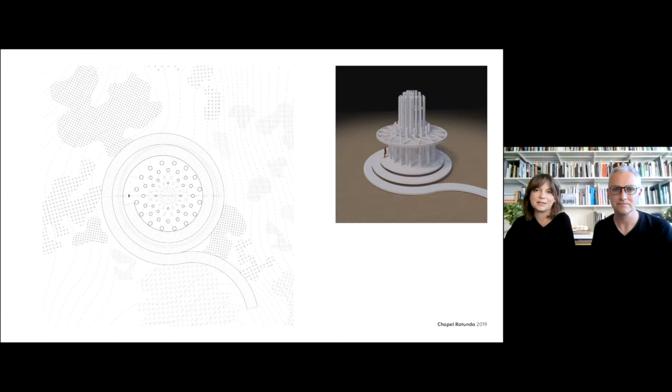Ryan and I started our practice together officially in 2017 after working together for almost a decade. We've always looked at architectural competitions as opportunities to test ideas, techniques, and partnerships through architectural constraints. It doesn't bother us if we don't win or receive recognition. It's the practice of continued exploration that keeps us motivated.

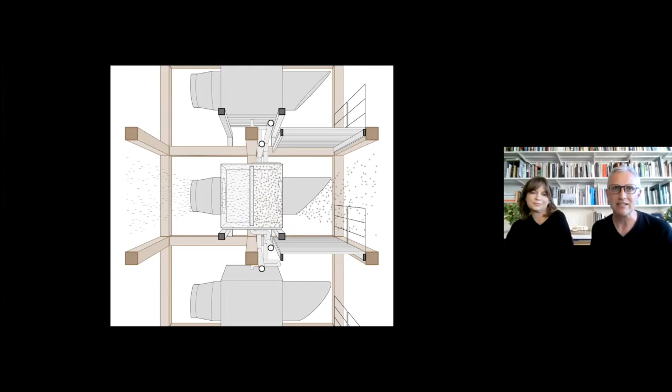The Urban Confluence competition was particularly interesting because it provoked a question that, to us, gets at the fundamental question of what our priorities are as architects. We've been thinking a lot about our roles as architects and how we respond to climate change. No longer is it tenable to suggest that a building for the long term, or utilizing increasing amounts of recycled materials, is sufficient. A more active approach is needed.

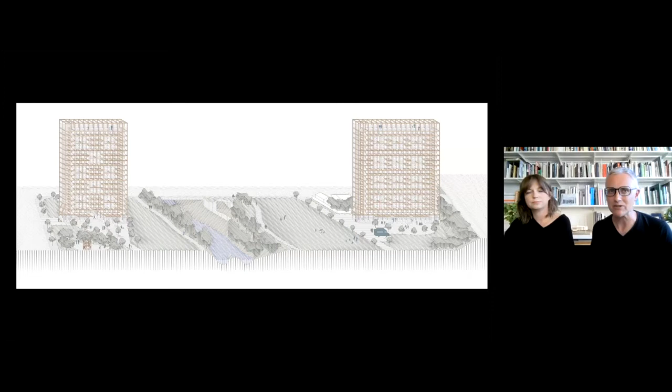Direct air capture is a burgeoning technology that scrubs CO2 from the air to be used for greenhouse growing, fossil fuel alternatives, or can be injected into the ground. By leveraging the attributes of this site, the Arena Respirator orients itself to the predominant wind direction to drive air through the system. Rising on each side of the river, this pairing of a large-scale porous framework visually links the east and west sides of the park.

Straddling the Guadalupe River, while providing a framework for CO2 capture and sequestration was one of the driving forces of the work. Another, as you can see from our proposal, was testing and pushing a representational technique that we have been interested in for a while.

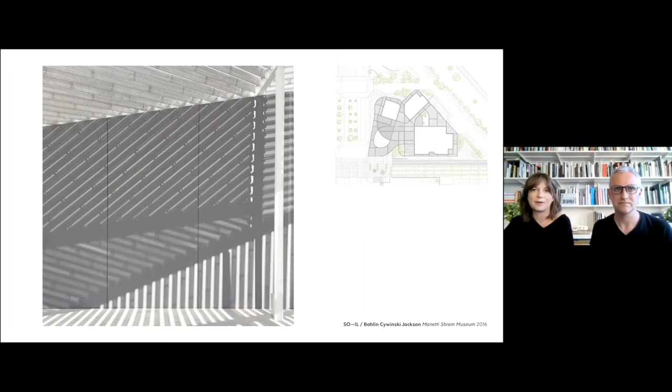Inspired both by the work that Ryan had done on the Shrem Museum of Art, as well as the conversations about formal projection that we were having while teaching Studio 2 and Design Media 1, we had been designing with this drawing technique for a few years, asking questions like, what are the minimum number of lines that can be used to convey an idea or a place?

How can lines be used to express light, form, material, and atmosphere? We know that representation, or how we draw our ideas, has a huge impact on how we see our work, and therefore how we develop it.

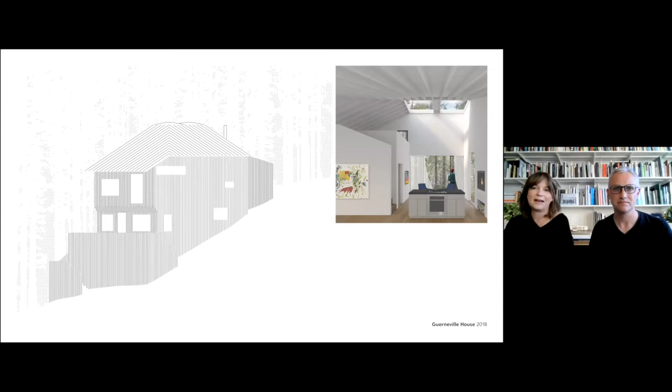For the Urban Confluence competition, we not only wanted to develop the work using line work or hatching as the primary tool, we wanted to tune the technique to work universally, conveying form, atmosphere, and materiality. Lena Kudinar, a then CCA student, joined our office that summer and was pivotal in helping us press these ideas into reality.

Reminiscent of the formal organization of computer processors and the racks used to hold computer hardware, a readily legible narrative specific to Silicon Valley conveys the uniqueness of this place. Like its inspiration, this framework anticipates technological change while drawing on the grid's immutable presence.

Limiting the materials that contribute to further carbon release, Arena Respirator uses a cross-laminated timber structure on a superlative, iconic scale.

Important to our work is an understanding of tectonic systems and how they can contribute to a building's environmental footprint. A couple of years ago, we were contacted by an emerging company that imagined an approach to building using recycled metal and mass customization robotic framing tools to deliver projects, specifically residential projects, with faster construction times and at more affordable prices. We partnered with this company on a residential competition based in New York, where we tested their ideas as well as our own collaboration.

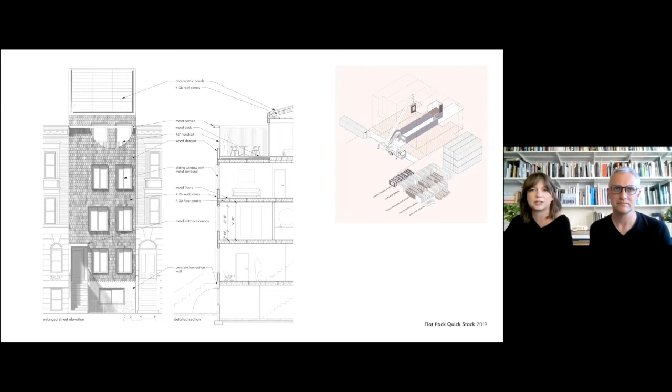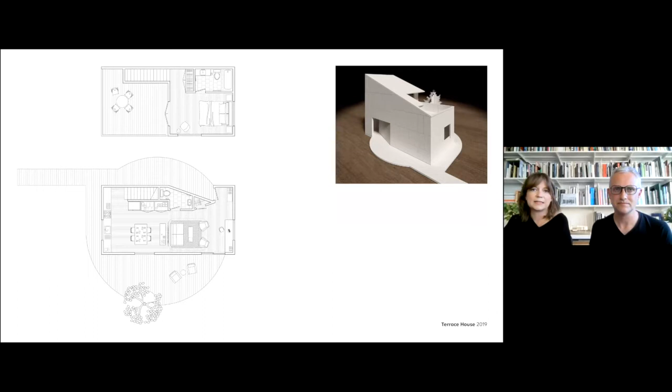That partnership continued over the development of several small residential projects, so-called accessory dwelling units or ADUs. In these backyard houses, we were not only using representational techniques to investigate spatial relationships that oscillate between connectivity and privacy, we were also thinking about lines and alignments. These ideas and forms were subsequently co-opted and once again tested in a quick competition for low-rise, high-density housing in Los Angeles. This proposal draws from a couple of precedents, the Courtyard House and the Terrace House, the projects I was just showing you, to foster community at multiple levels and build social relationships.

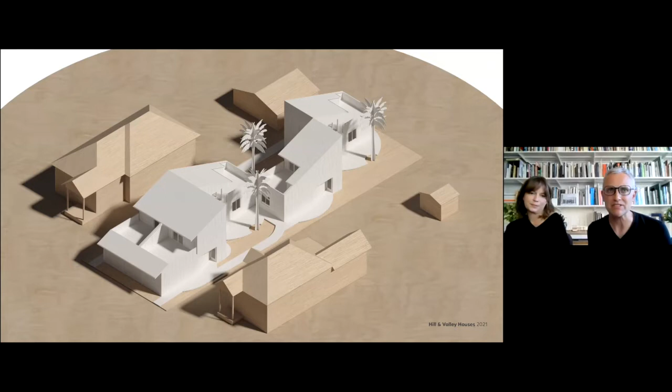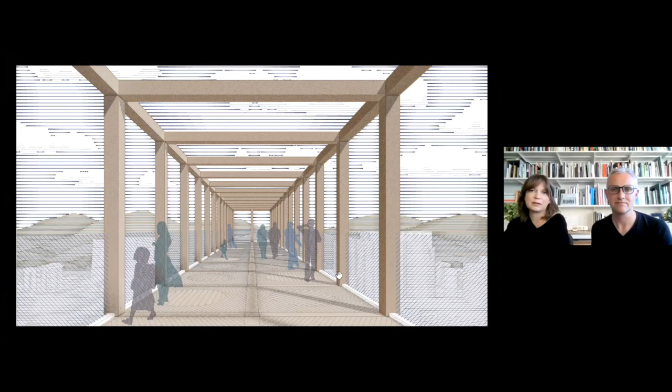We've been inspired by the work and words of the Brazilian artist Lygia Pape and her attempts to make positive and negative space that have similar value. For us, especially during the pandemic, as the boundaries between our work and home life began to blur, these ideas suggest thresholds whose porosity feel appropriate to our era, neither modernist and open, nor traditionally closed and hierarchical. We've just begun to speculate on the resulting organization of a spatial construction of work and life.

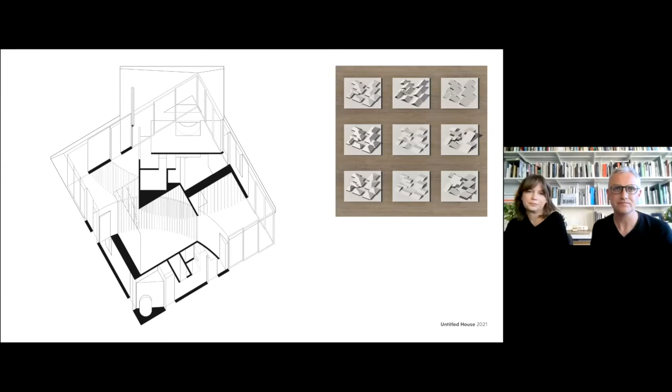We believe that new architectural paradigms need to be envisioned and explored to both inspire and protect humanity. As we establish an ethic of responsibility and renewal toward the earth and social relations, our work is an attempt to discover a coherent set of principles that may help define this new paradigm. Thank you, Keith, for the invitation to speak about our work and our ideas.

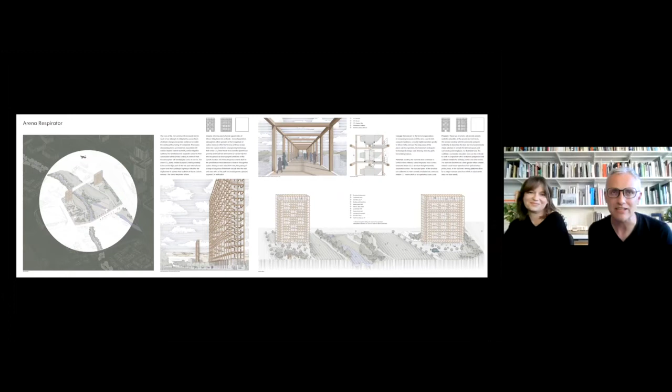And now we'll hand it off to our friend, Clark Thenhaus.

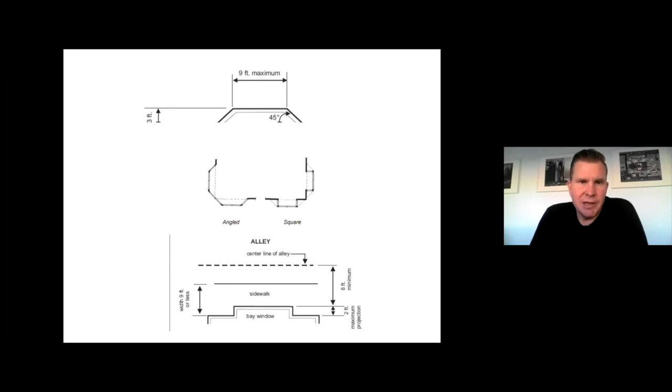This plays out in a variety of ways in practice and teaching. For example, looking at planning and preservation codes in San Francisco, which produce both geometric and proportional material limitations or regulations on forms like turrets and bay windows.

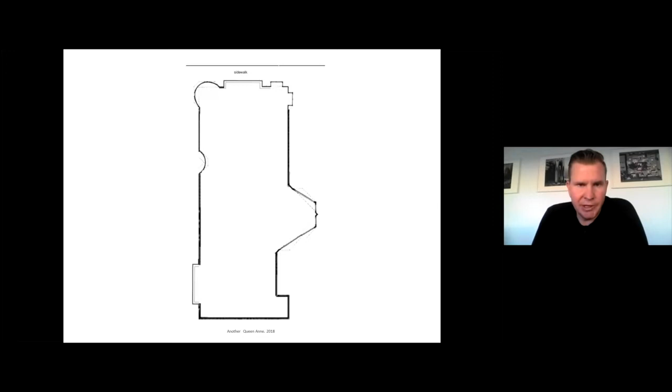Leveraging, abstracting, or using those regulations to create a gallery installation of between 8 and 12 foot tall turrets that reconstruct a streetscape within the gallery context, perverting those planning and preservation codes to new ends—or taking that further, cutting and pasting diagrams from the preservation code into a complete plan. Parts become composed into a whole, translating that through elevation to create a new expression out of those regulations.

Taking this even further into a kind of critical satire, perhaps, of a drawing. This was actually produced for an exhibition at CCA curated by Adam Marcus and former faculty Andrew Kudless.

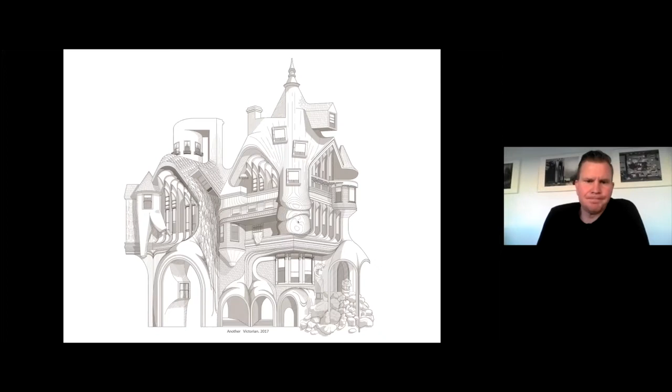In other cases these manipulations within the practice play out—for example, this farmhouse project in Colorado, where the manipulations are to a porch and a chimney, abstracting or defamiliarizing those elements to move away from the traditional frontality of a farmhouse.

In other cases, something like the bay window gets inverted, or the scupper becomes so exaggerated that it actually peels through the wall and directs water into embedded cisterns for water collection.

In this ranch house pop-top renovation in Denver, the gable roof simultaneously reads as a gable roof form yet also as a cut or carved mass, punctuated by a scoop porch and an inverted picture window.

So while there are these underlying techniques of abstraction, exaggeration, or perversion applied to familiar elements, you might also notice a kind of formal sensibility in the work, an interest in Platonic solids and geometric primitives.

This really comes from an interest in an obscure drawing series by Louis Mondet called Some Penetrations of Solids. What I find interesting about these drawings is the geometry and mathematics, but more interesting to me is how we can name each part.

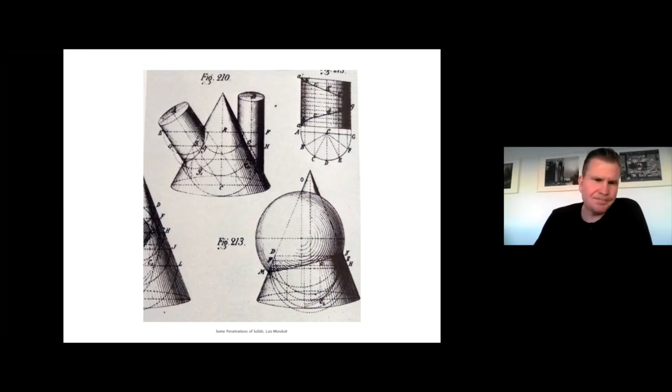That for me is a way to open up and produce new associations of familiar things. Some work takes that on quite literally, reproducing some of those drawings in built form or model form, or in other cases deforming them in 3D printed models as a way of testing the limits to which the legibility of that geometric primitive is maintained or lost. That also becomes a way of working through projects.

This was a competition proposal for a music hall in San Francisco, where you see an aggregation of cones and cylinders in which the cylinders are cut with Gothic arches to reveal a cube embedded within them.

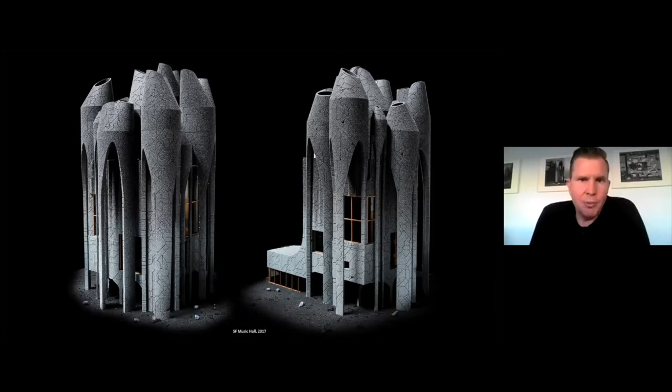More directly towards the competition proposal, a series of dome projects. This was a project for the League Prize in 2015 called Project for Domes, in which historic domes were recomposed using only spheres, cones, and cylinders, producing this kind of abstraction.

Surrealist techniques of combining things that don't necessarily properly belong together, like the American Prairie and a gilded dome, produce new associations or strange meanings. In this case, each dome was a marker for one of the middles of America.

This led to a series of other dome projects. This one, or these two, I should say, were at the invitation of Goldenvoice for a potential build at Coachella Music Festival in Southern California.

An important part of this is the underfoot of the dome. So again, the dome is most often a signifying part in most buildings. Here, the removal of that institutional underfoot produces new associations and new capacities for the dome, in this case, to convene a kind of social concert party atmosphere.

So when it came to the competition, similar to how Ryan and Kristen were talking about it, it was maybe not an explicit desire to win, but maybe more that the competition provided a venue to think about scaling some of this work up or positioning it in different ways.

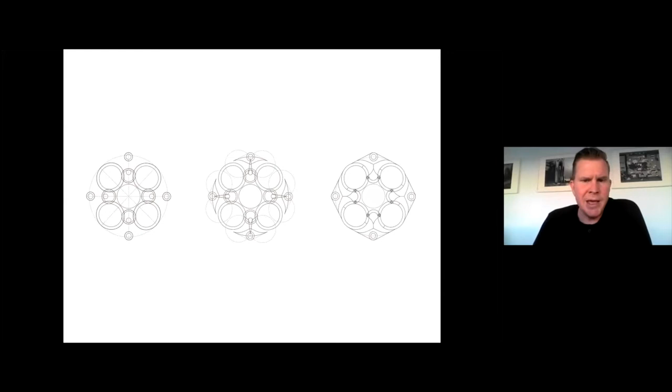This was actually a little model for a different dome that was to be in LA. Geometrically, what's happening is it's just taking the conventional quatrefoil or four-lobed dome and creating a rotation to make a quatrefoil dome, which is four lobes, rotating it to create an octafoil dome. In doing that, the competition sought to scale up the dome from being something previously ceiling-like or pavilion-like to being something larger and fully spatially occupiable.

Again, thinking about that surrealist technique of this dome, so to speak, where there's a strangeness about the relationship between the two, yet there's a purposefulness to that. This is, I think, enhanced or exaggerated by the coloration of the dome.

In this case, leveraging the cultural history of wood shingles in the Bay Area, and swerving that towards new media and technology, through coloration and patination of different metals, as well as kind of solar films that are embedded into them.

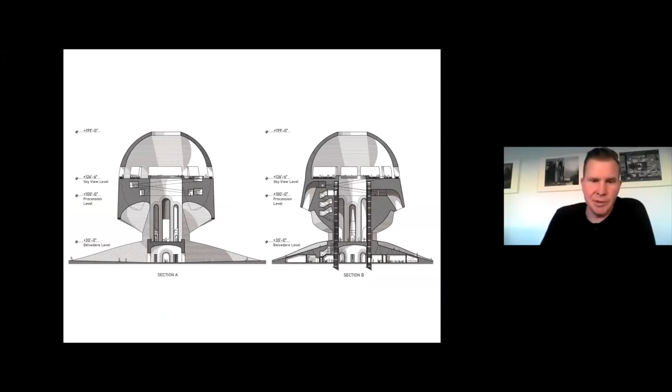You see here in section how you can move under, up, and through the dome, eventually ascending along this ramp to the sky deck. Here seen at the Belvedere level, and then on the left at that sky deck level.

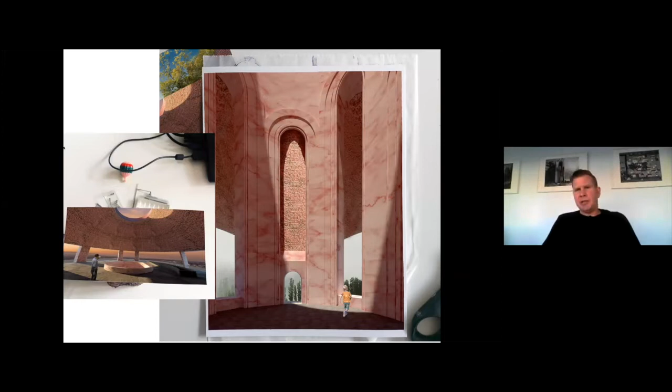In this competition, there's really a sort of claim for darlings, as I call them, as a part within a whole, in this case, only a part, to become the actual entirety of the project, with the idea that by working on the legibility of these familiar things, there's an explicit intention to shift the arc of attention or to shift the arc of spatial and contextual experience, while simultaneously working within inherited codes or conventions or building categorizations or legibilities that often condition expectation.

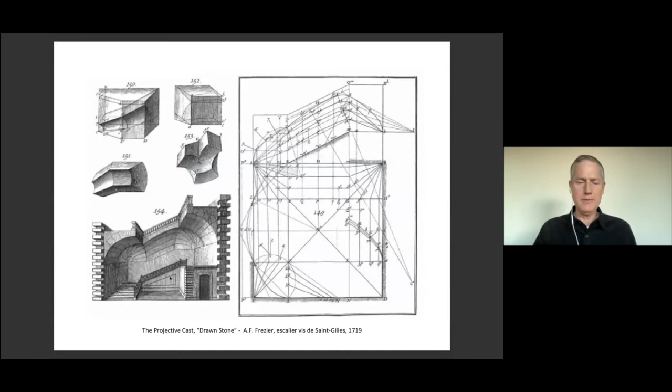The other thing to mention is these two figures, Gaspard Monge, and the person who followed after him, Theodore Olivier.

Monge, we might not know much about, but we certainly as architects use all the things that he's worked on. He could be considered the grandfather, as it were, of descriptive geometry. It's the way we work today in plan, section, and elevation, actually describing an object we're going to be building. He helped codify that way of working.

In particular, it was for people making mechanical devices and machines, and that's where Olivier picked it up and ran with the ball. Both of these folks did a lot of teaching and were part of training engineers and makers of mechanisms and different farming devices. But the geometries they had to do to understand them became their cause.

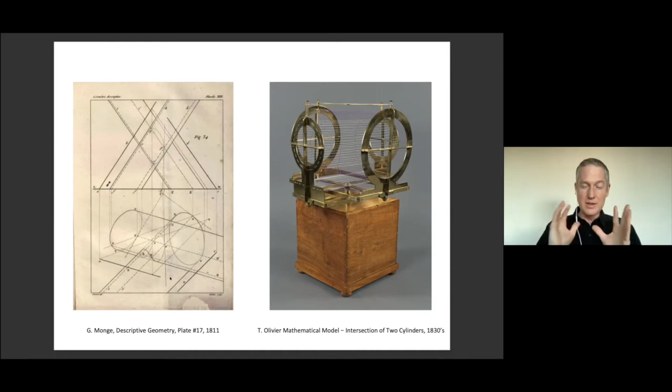This is a plate on the left-hand side from Monge's book on descriptive geometry from 1811, talking about the intersection of cylinders. On the right is the 3D version that Olivier had done, but it's actually a string model, and it's operable, interactive. It shows how that intersection can change if you change the shape of the cylinders and their angles. So both drawing and making the drawing became quite important to me.

So I'm going to jump into my work, fast forward. I think I was doing these installations at CCA a couple of summers ago, pre-COVID. This is literally a drawing I was doing in 2019, so fairly recent work.

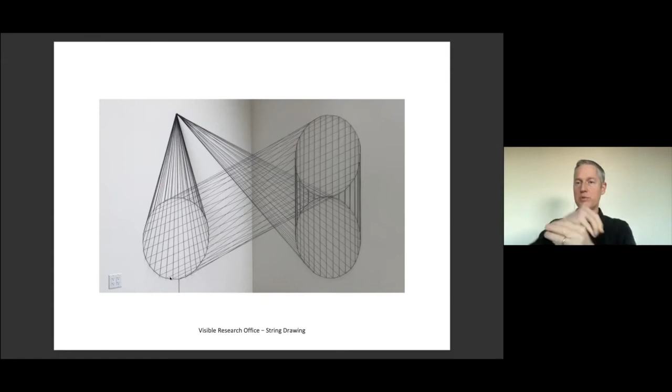What it was is understanding translating drawings, a gray pencil line on a wall, more like a mural, but pulling those lines into space, literally. These are yarn drawings, string drawings, descriptive of cylinders and cones, but also bringing them through space to transpose with one another, have discourse with one another. If you could see them, you'd see that they're actually three-dimensional. They're quite interesting.

This is one of over 70 drawings, murals, objects that I created over the course of one summer, just to explore that idea a little bit more fully.

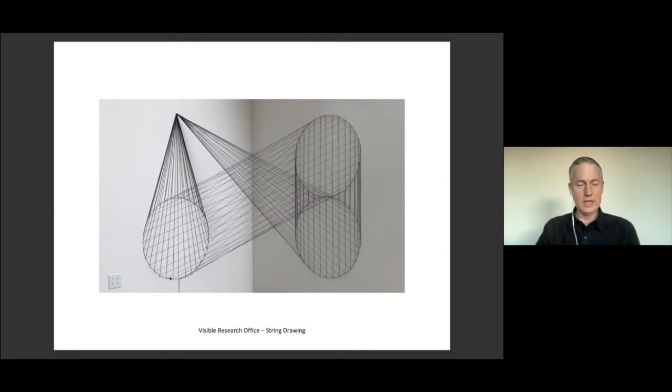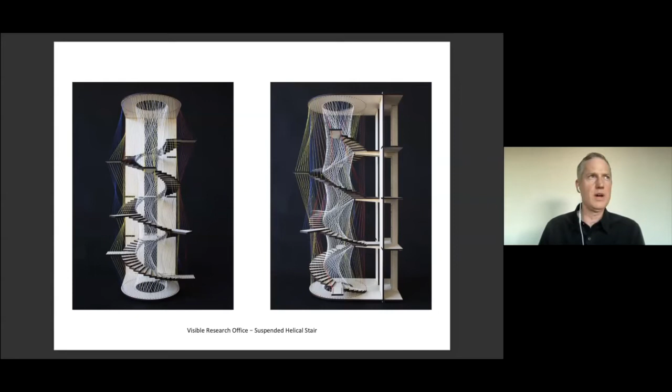I worked with Steve Ratchey, a faculty member here teaching structures, who's also a VP at Thornton Tomasetti, and helped me develop this more fully. He actually blew my mind when he said, Mark, you can't make the stair light, you have to make it super heavy, and in fact these cables, you need more of them. So I love the guy. It all totally worked out in the end.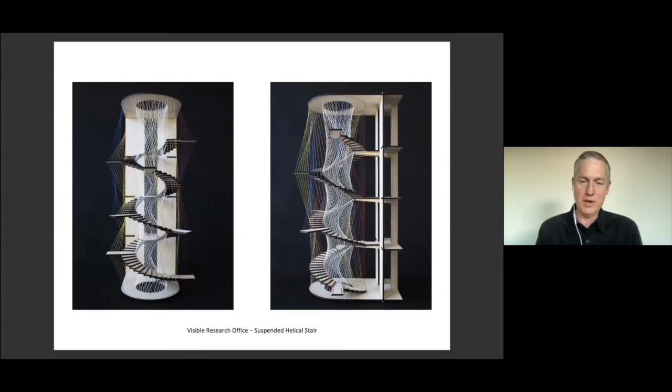I finally ended up with this, so I have to find a place to actually put it. Part of that was coming up with an idea of how to create an instance of it, an instantiation of it, sort of proof of the pudding.

I created a sort of fictive story for myself that a series of museums around the United States were frustrated with the staircases that they had, and they needed a new staircase. So I did this one.

Imagine what this would look like: the suspended helical stair at Frank Lloyd Wright's Guggenheim Museum in New York. But I also imagined one at the Yale British Art Museum by Louis Kahn, and also one here in San Francisco, because I think we really do need a new staircase. I'm not quite happy with Snøhetta's version. In fact, I was a little bit happier with Botta's. I don't know about you folks, but I think Botta actually had it over Snøhetta.

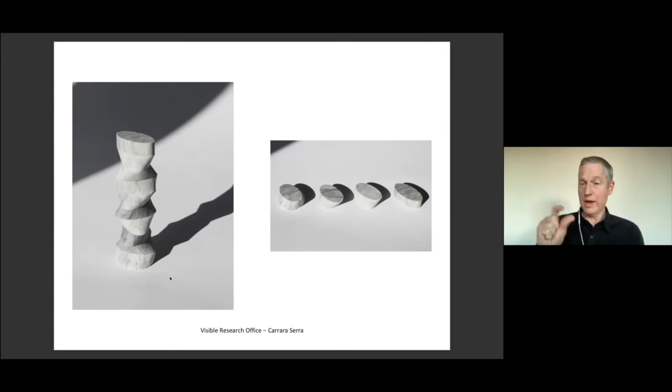I think you all know what water jet tools are. I had a chance to actually work with Autodesk's fantastic equipment, these sort of high-octane 3D milling machines, etc. In this case it was the OMAX water jet, and I realized it's very good at cutting straight lines, but I managed to find a way to hack it so it would create angled lines, and actually used it by moving the head and also the bed to create these oval shapes.

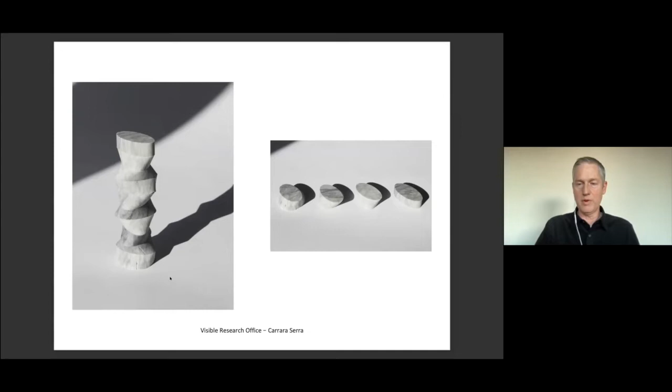So it was actually straight lines, ruled surfaces once again, but cutting through stone, cutting through marble. Maybe this is once again my ode to Robin Evans and drawn stone, that earlier piece I'd shown you folks. But in this case it was creating a series of elements which could then be stacked to ultimately create a tower. It's actually a very simple looking shape, but can be recombined in a variety of different ways. These were definitely the precursors for the piece that followed, which was my entry for the competition.

So I was looking at lines of force, understanding that it has to resolve itself in particular ways. My project, the proposal for the competition we did down in Silicon Valley, was called Twist Light Tower. It was literally a tower, similar to what possibly Ryan and Kristen were doing, and possibly what Clark was doing as well, where you go up to the very top and from there you can look around. But it was trying to resolve the geometry of the primary view, which is of downtown at one angle, versus the ground plane, which is trying to reorient itself towards the surrounding urban block and the park. So that kind of resolution of the two caused the twist—or that's the story I'm telling myself these days.

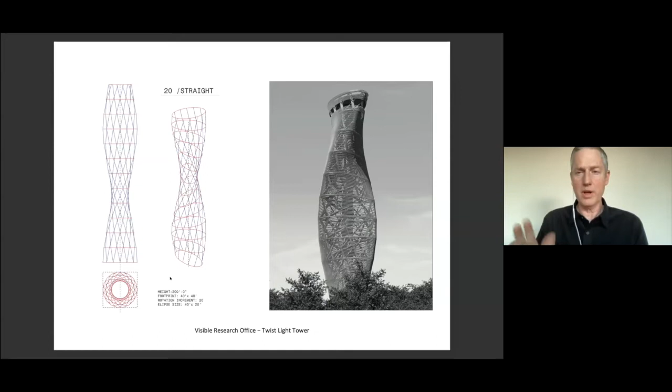And then ultimately we're trying to resolve it too using particular materials. In this case it was wood, both as an exterior wood lath, but also interior—it's actually the structure of the building, as it's all done out of CLT panels and heavy timber construction, but also a good bit of steel to actually hold it up. So it was the exploration of those. There's some images of that ultimate proposal for the tower itself.

And more importantly is actually what the experience would be like. In this case it was a stair—I think you got a theme that I like to pick up on at this point. It's a spiral stair, using the idea that two means of egress are required out of most buildings, so this is actually a double spiral stair going up to the very, very top. But it's also helping to animate the experience of going in and around and through the building. There's an elevator core at the middle, the spiral stair around the perimeter, and then the observation deck—two observation decks, in fact—on top.

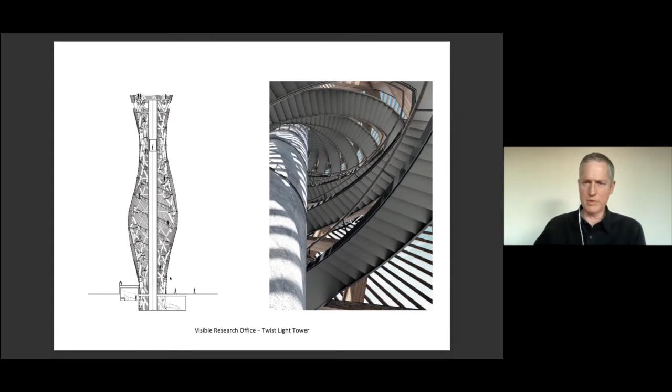And the way I was getting into the museum was actually using a ramp that would lead you down to the bottom, primarily as a way to talk about the building that had preceded this, the electric light tower that was in San Jose, but also its relationship to the Eiffel Tower and a bunch of other interesting towers done back in the day, that this is kind of an ode to. This is more of a drawing of what the construction was like—the idea being that these elements could be stacked one on top of the other once they've been constructed, and then just create the tower out of itself.

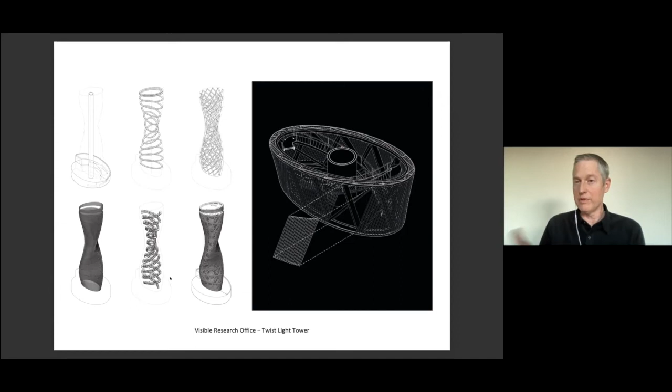So some of the limitation factors were how high a crane could lift each one of these pieces and what the weight of each one of these pieces were, so it actually could be constructed. We took that quite seriously and tried to do it with some degree of efficiency of materials. And in the end, that's the floor plans.

The idea also is that as you look at it from all these different orientations, as you move around as a visitor to the site, and also as a person who walks around the city, the tower would appear differently from different orientations. That's another reason why the twist worked in an interesting way, that it had different readings depending upon where you were.

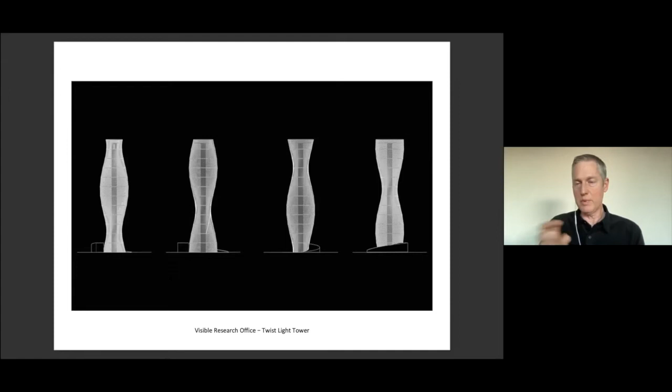So, and I think with that, I think I'll end it and pass it on to Thom.

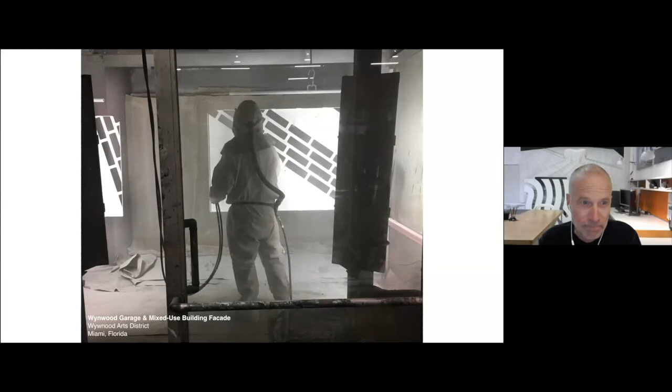So I'll open with a couple of other projects. This first one is for a facade design in Miami, where essentially we created 1,500 flat drawings in metal, each one about 11 feet long. These are individual patterns, each one unique. And here you can see them coming out of large ovens where the paint has been baked onto them.

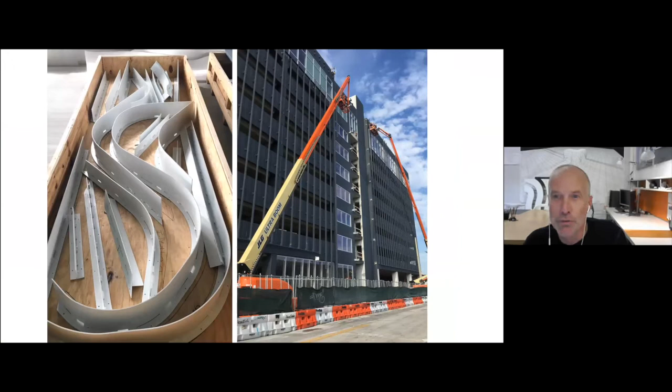Each drawing or panel is cut into rectangular sheets and then was painted, as we just saw, and then packed for shipping and installation. All of these sheets, in addition to 1,400 uniquely hand-bent and welded fins that we see on the left, were designed to wrap this new 8-story building, which we can see on the right here.

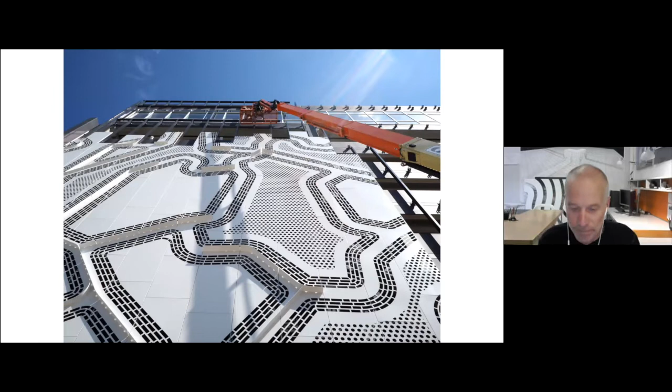Given the scope and scale of the facade, the thinness of the envelope is still able to alter our perception of the overall volume. And optically, it recalibrates the enormous mass, which in effect more readily syncs with this gritty art neighborhood, this part of a district called Wynwood in Miami.

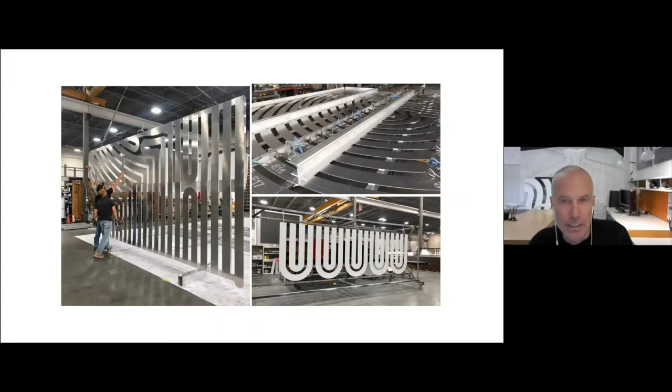And then finally, it's back on site where it is craned onto the face of this new hotel in downtown Oakland. It's called Moxy, and it is at the corner of Grand and Telegraph.

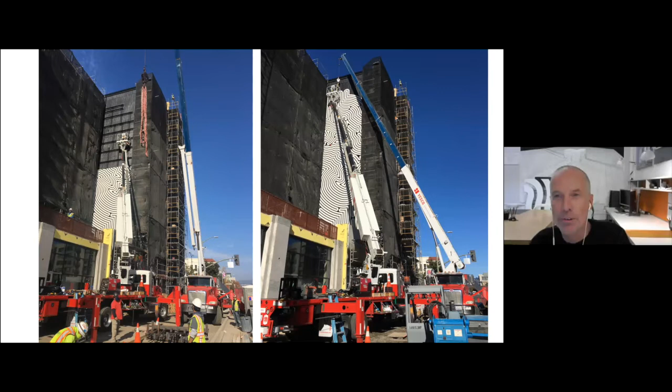Within the pattern is embedded an outline of the city of Oakland, and this intentionally adds a visual urban marker to this eclectic part of Oakland, part of the city.

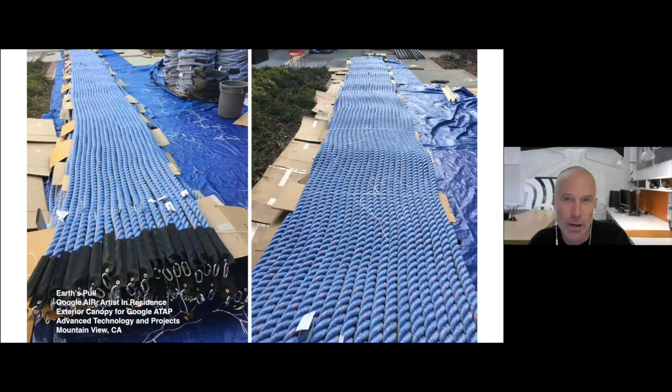And one other project that I'm going to show, which has a lot of what we're trying to do, which is to achieve surprising and sometimes unexpected outcomes, relying on really reductive tectonic and material menus, processes or techniques. Put another way, how can we achieve exuberance or even excess using reductive strategies?

So in this case, only rope. I was working on this canopy project for Google while also working on the Confluence Silicon Valley competition, which will be evident in a minute. This is called Earth's Pull, and we used 1.5 miles of really thick, 1.5 inch thick rope to create an overhead shade canopy, using the downward force of gravity as a literal form finder. The gravity pulls the catenary curves into place.

Earth's Pull by design invites occupants to take notice not only of what's overhead, but possibly of the presence of gravity in the world beneath our feet. The ropes are always swinging in the wind, and when you're there, it feels like a very large, comfortable blue water drop, pulsating overhead. It's quite simple and yet effective.

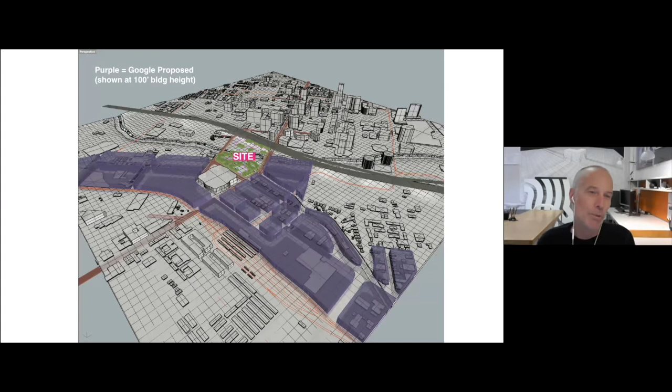And so we modeled some of the expected architectural growth. We can see how the site functions as a kind of downward trough resting between the two architectural cores, the original downtown off to the right and the new transit village off to the left. Though the competition brief was pointing towards the idea of a singular icon, possibly a tower, we proposed to do something quite the opposite, in an effort to challenge the sponsor's assumptions.

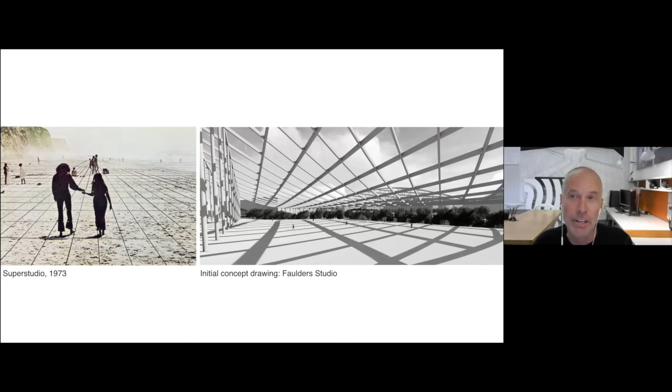So keeping in mind this future urban density, our idea is to create an overhead surface that would define a single outdoor room to be used by the city's occupants. And resonating with the primary product coming out of Silicon Valley, that of the network, we thought it could exist like any network, ever present and open-ended.

Mark Cousins, in a text called The Ugly, writes that a sublime space, quote, seems to have no limit and no proportion. The sublime is neither an image nor an object of a particular type, but the enactment of a scene in which the subject and the object have a dynamic relation to each other within a specific setting.

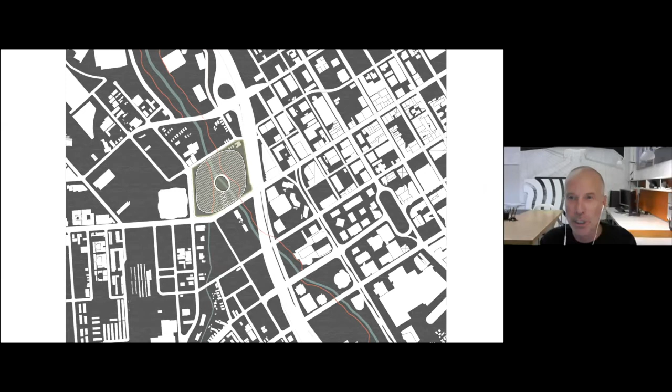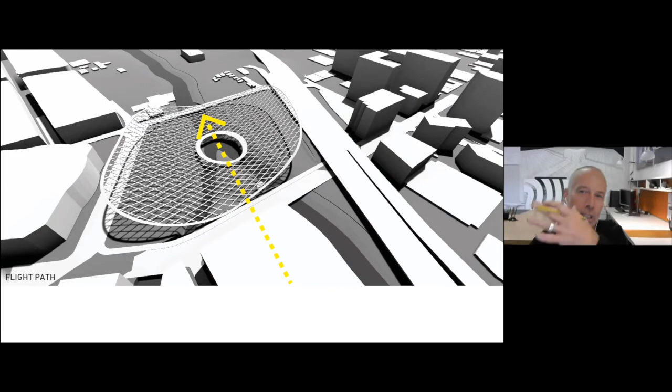So here's some preliminary sketches that we did. Here's a site plan, so you get the scope of what we were doing, much larger than SAP Center off to the left. We liked the idea of creating something that slumped downward rather than being upright and singular, so we let the site pressures determine the form. Here it dips down in response to the adjacent airport flight path, which is very close, and you see the airplanes coming right down. It's pretty cool. It pushes up towards the building cores at either side.

We made a void at the river's confluence in the center there, and rounded the edges to accept the primary pedestrian flows.

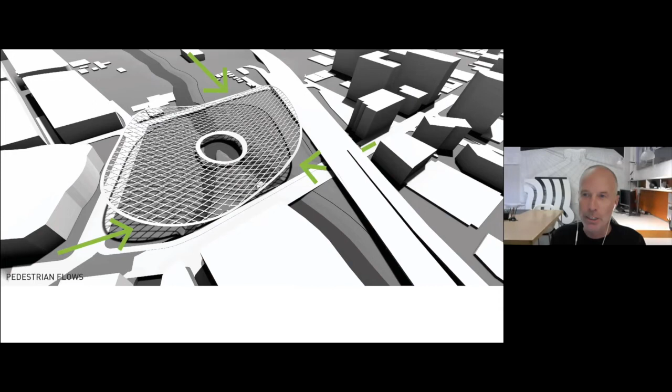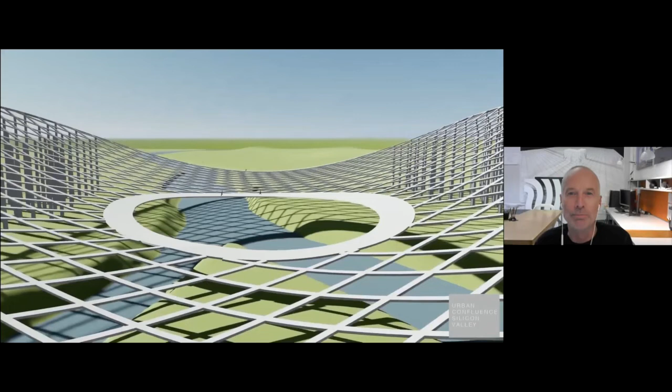The author Barry Lopez, in describing the Arctic, which of course is a very different place than San Jose, writes: 'The physical landscape is baffling in its ability to transcend whatever we would make of it. It is larger than our grasp, yet somehow it is still knowable. So could we propose a scale of building that is conceived as a single object, yet could extend beyond our perceptual reach?' That was the question we had for this.

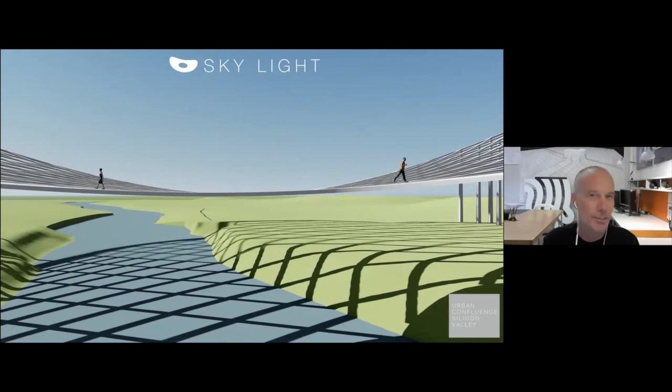So we decided to create a valley within the valley. Clever, right? By tapping into the region's unprecedented way of doing things differently, our proposal, named Skylight, spans a massive 14 acres of land and reaches heights of 150 feet at either end. It's entirely open air and wafer thin, framing the ground, the vegetation, the waterways of the park, acting as an intermediary between ourselves, the ground, and the sky.

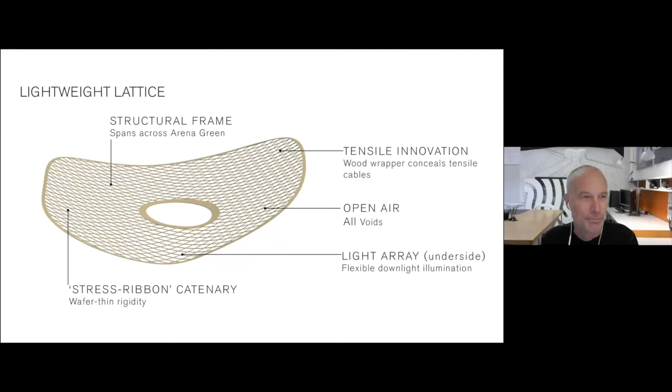To experience Skylight is to be immersed into an architectural valley of the sublime, made more strange by being located right next to San Jose. Here you see the timber supports, lightweight lattice, and landscape plan. Reconceived as an outdoor room, the park is outlined overhead by voids.

The park is currently entirely nondescript, but just by putting this mesh over it, it completely transforms it. It's constructed primarily in timber, the only carbon neutral and renewable building material we know of today. It captures solar energy during the day and punctuates the nighttime sky with downward lighting.

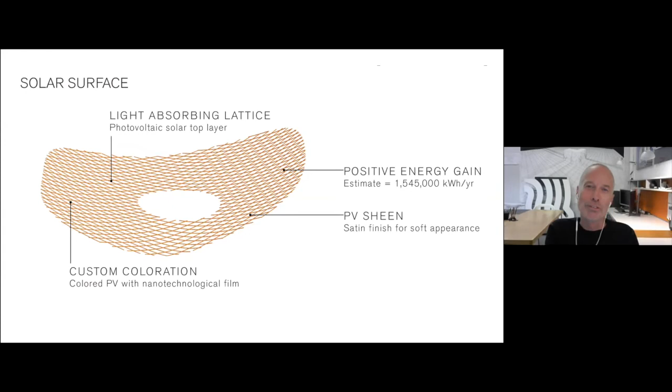We even calculated the photovoltaic output, and we got kind of obsessed. Even though it's a speculative project, we're even choosing the colors of the PV panels here. And yes, you can see in the image there, you can even get pink or bright green PV. It's pretty cool. It's immense in size, and yet it's configured to the human scale.

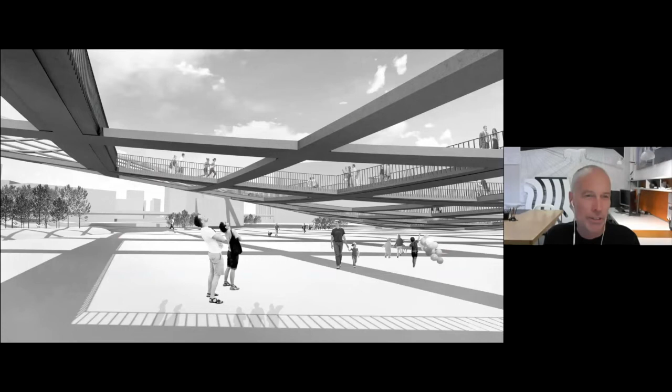This is the final image here. I began with our Wynwood project and described the effects that thinness can achieve, and I think it's something that resonates and something we were interested in with this project as well. So thank you very much. I'll stop there.